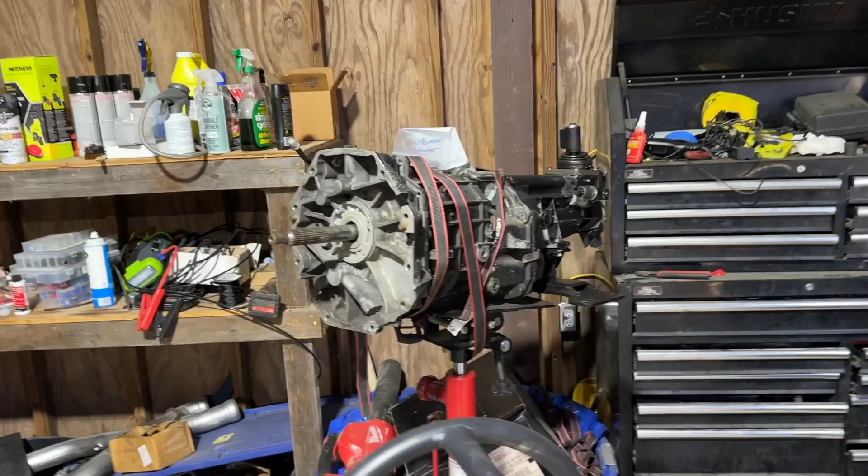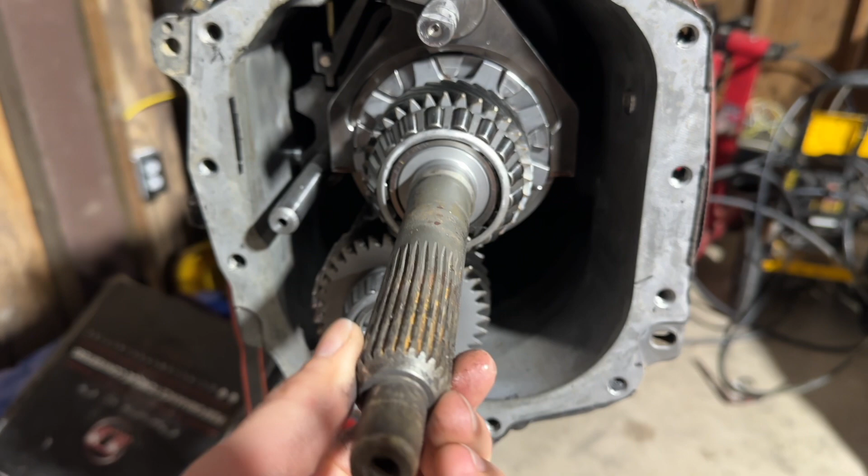Right here we have our face-plated transmission. This is the built trans that's in the race car. If you look at the splines there, we have officially twisted the splines, and that's not great. Unfortunately, that's a bigger problem than I had originally thought.

I said, okay, well, I twisted the input shaft, I'll just get a new one, throw it in there, call it a day. Well, here's the problem: this input shaft, go ahead and try to pull it out. That's right, you can't, because this is in the way, so it has to come out the backside. Not too big of a deal—order a new shaft, come in, go ahead and swap it out, take everything apart, put the shaft in, put it all back together same day.

Well, here's the problem. Liberty is the one who makes this face-plated gear set, and this is what's needed for this power level. They make an upgraded shaft and also a stock shaft, but they are 4 to 6 weeks out. And I'm also hearing that 4 to 6 weeks is more like 6 months, which is a huge problem if we want to race this car.

So unfortunately, I'm kind of stuck. This is a very inexpensive part in the world of this thing—about 400 bucks. I can take the shaft out and send it out, but I'm being honest with you guys, I can't take this thing apart, sit it on the table for what could be 6 weeks or 6 months, and effectively put this back together without a problem.

So that's where you need a transmission shop, and we might send this out to a transmission shop to get it done. The other option is to talk to someone like Calimer—they make a G-Force unit, which uses a completely different gear set. The only problem is it's very expensive. As you start going fast with a stick shift, this is the problem, right? So this is a $400 fix that takes 6 months, and the other one is a $12,000 fix that can be done in a few weeks.

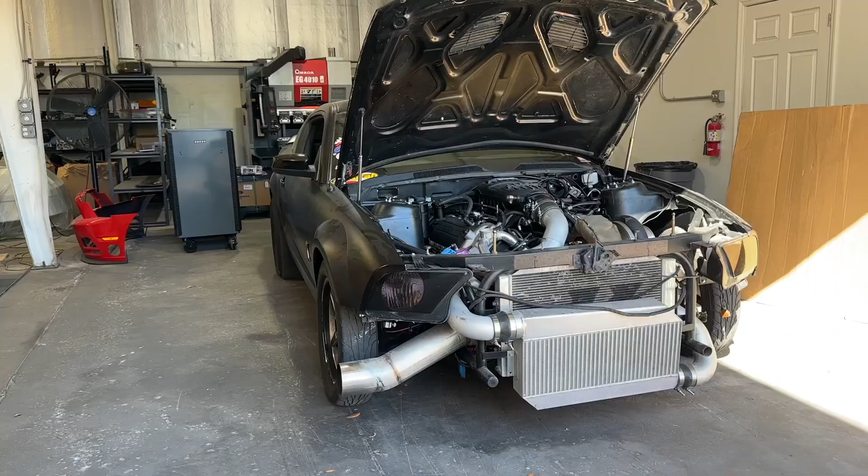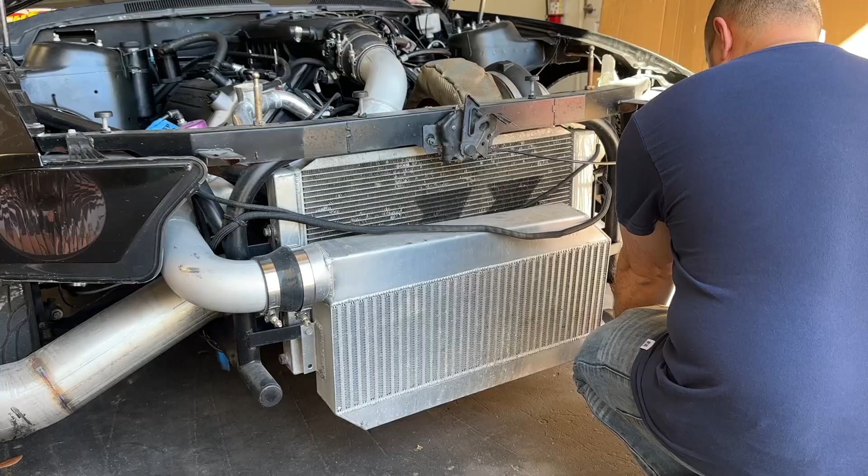Damn. That's a thick boy.

Just dropped the GT500 off with Siley - they're gonna go get that intercooler knocked out. It looks sick, it's huge, should work pretty well. I didn't plan this originally, but I got talking with someone last night - they really need their car tuned. It's at a dyno shop somewhere local here nearby in Tampa. I don't really know Tampa that well, so I just say Tampa, but there's Clearwater and all sorts of different areas, but it's only half an hour away, so we're gonna go head over there and check in.

I think it's like a Paxton blower 2-valve with cams. We're gonna try to get that tuned and knocked out, hopefully get paid there, and then head back, pick up the car, and then we might even be tuning another car in this area later - it's like a Kenne Bell 2-valve as well. So it's gonna be a busy day, but you know, we gotta hustle, we gotta make the money to pay the man.

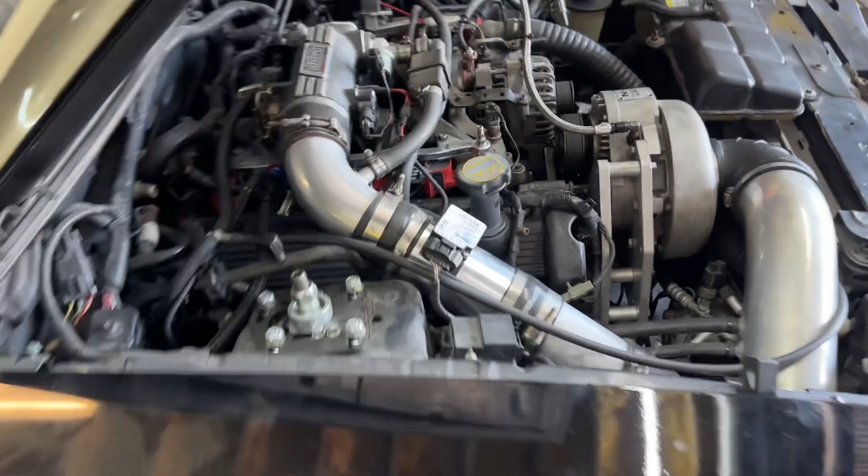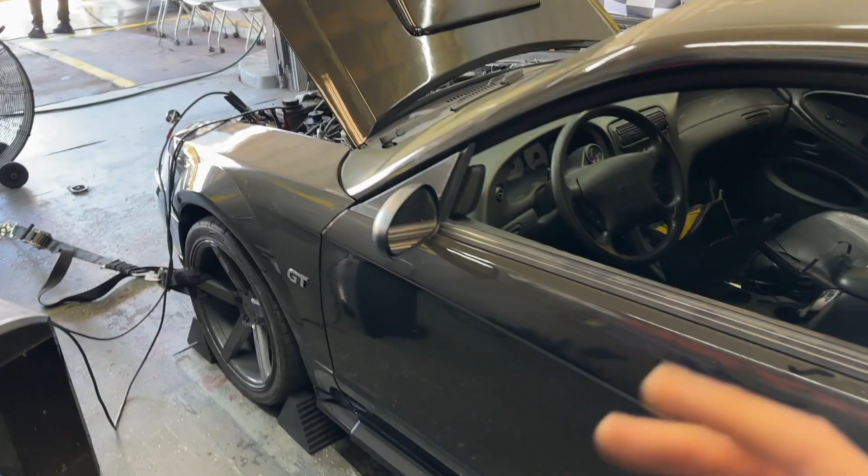I got it started running. This car hasn't ran in a long time, so we got to tune it. It's running decent. We're gonna start running on this dyno and see if we can get it to tune up decent. There's a few setup issues, but we're here now, so we're gonna try to make them work.

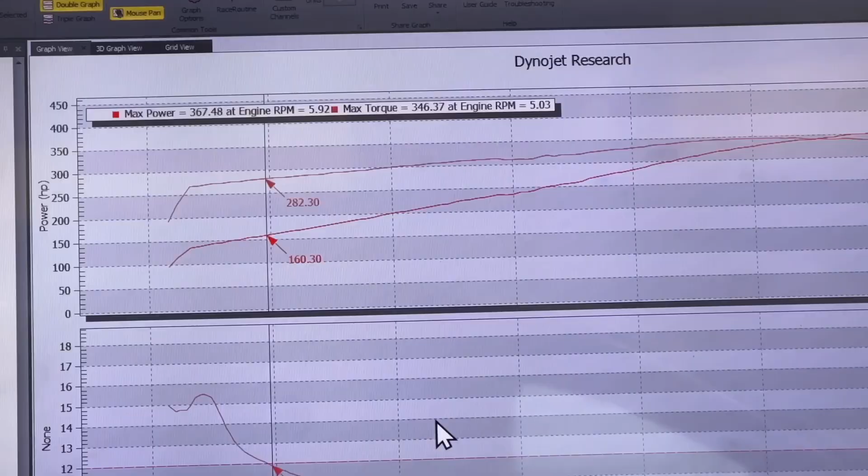First pull, we got 367, 346. It was pretty rich - the wideband's at the tailpipe. I don't really love it, but we're pulling some fuel out and gonna see if we can make some more power.

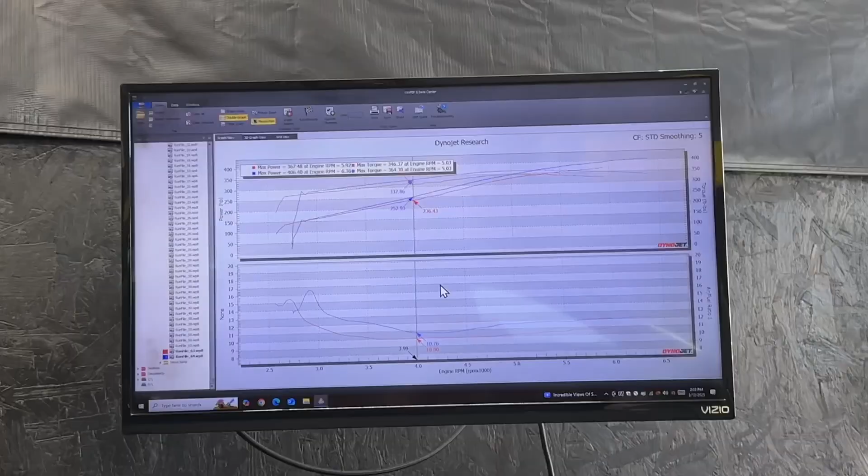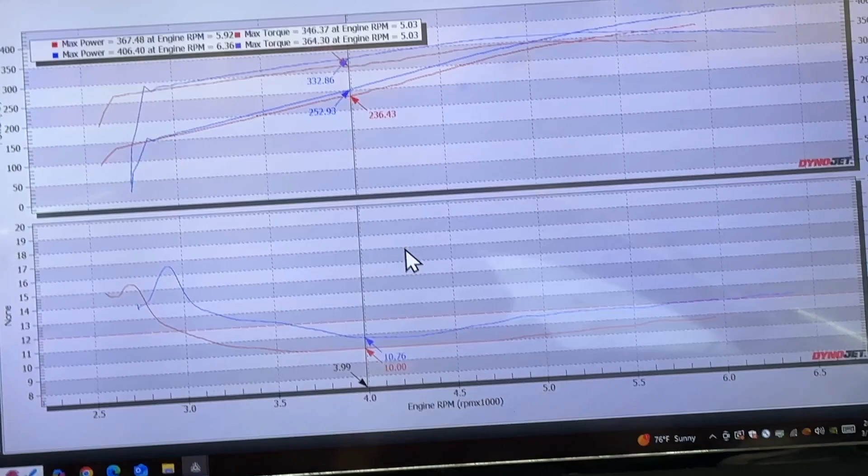Well, we saw some pretty good gains leaning it out - 406, 364. You can see the air fuel line is significantly better. This little dip where I have the cursor on, we're pulling some fuel out to 10.7. We're going to try to ride like a 12.0, 11.7 line as the boost starts to come in, and then ride this nice 11.7, 11.8 line.

What happened here? A little plastic just shut off - good old plastic intake manifold. Yeah, little fuel leak.

It made 400 horsepower, so twice.

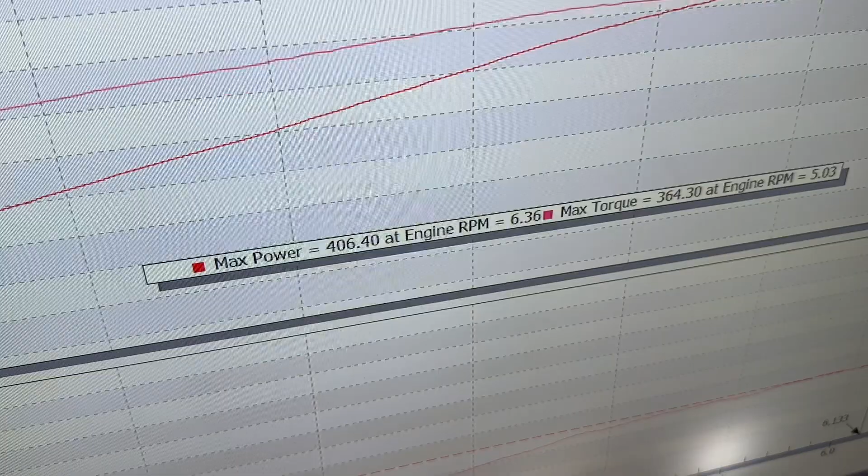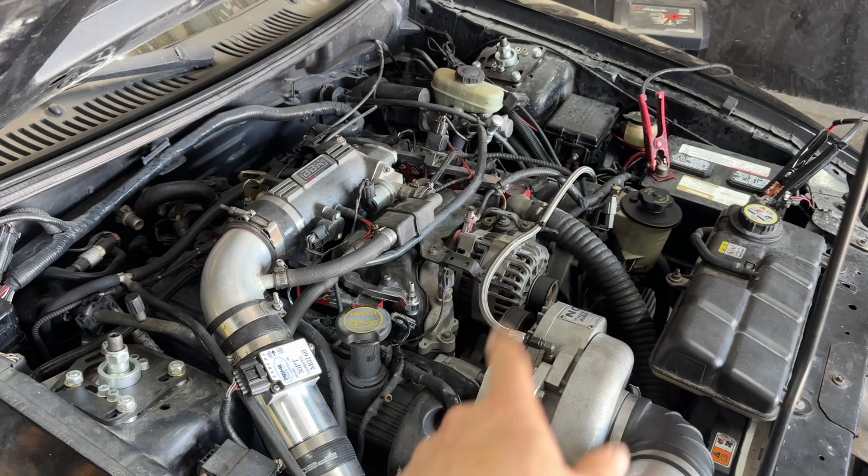We ended with 406, 364. It's about 6 pounds of boost. Air fuel's good. We didn't get to finish - I think it would have made about 420 or so, but it had the fuel injector problem, and then the alternator went out and it's throwing sparks and losing battery voltage. So it's gonna have to be fixed, but for the most part, I think it'll run and drive, and it'll be able to make some boost as soon as those things are fixed up.

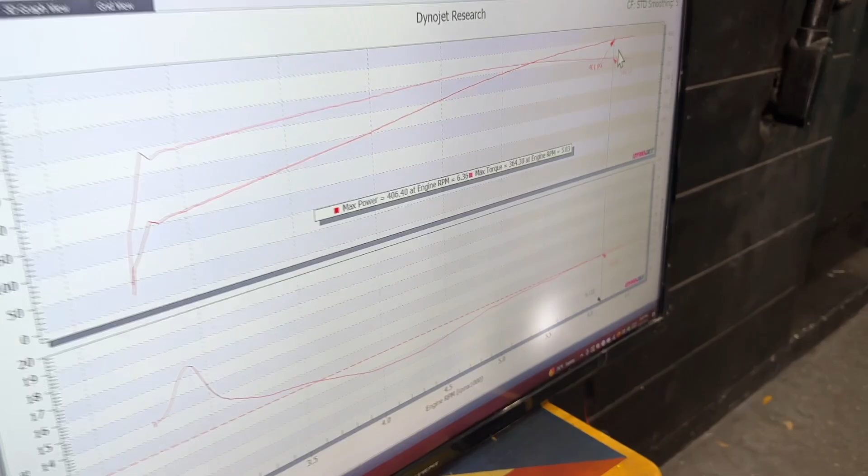Got the Paxton 2-valve tuned up, and it made some decent power: 406, and that's only on about 6 pounds of boost. It has some cams done to it, but otherwise nothing too crazy. I guess it's been sitting there for a while.

Had a chip tune in it, had someone else trying to tune it. The ECU was kind of bricked because this happens a lot—tuners will change strategies and VIN numbers and do some weird stuff with the computer, so SCT wouldn't connect to it. I actually used HP to force a stock file into it, and then I was able to load it with SCT. Weird things happen with these older cars, tuners, and chips, but we got it tuned up, and I think he's gonna be pretty happy because he hasn't had the car running or driving in a while, and he's put a lot of money into it.

So we're gonna head back, go check on the GT500 and help them finish that out. And then I think I got another 2-valve to tune later on.

All right, so we're here with Sai Lee. Hey, we just got the car finished up. Well, you did—I went off and tuned the car. You helped, you pulled the bumper off and brought me the car. Yeah.

So we got a custom intercooler. Do you want to talk about intercoolers and what we had there before, which was a more basic intercooler, versus what this is? Basically, Andrew reached out to me—he wanted an intercooler that was going to help him with our BLF turbo. What he said to us was, man, I'm having very high IATs. So here, check it out—this is what he had before. It was kind of small for what we're trying to do. I think you made about 1300 with it, basically. So his goals are obviously much higher than that.

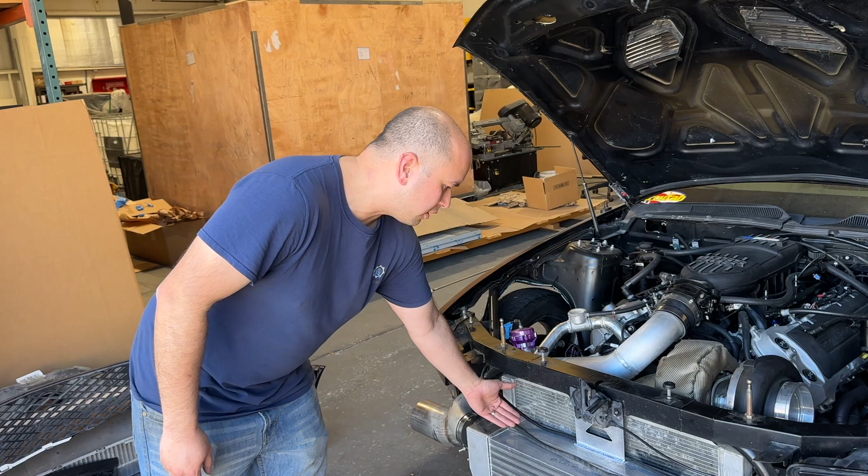So we built him a stacked-up Garrett intercooler using Garrett cores. It comes out to be a 6-inch core intercooler—a little bit of a tight fit, especially with the bumper. We had to murder that thing pretty bad, but it's on there now. So that's what we have—a big 6-inch core. I think it's going to help your IATs go down quite a lot. I can't wait for you to post some data on this, man.

Are you going to do that? Well, I mean, on the Dyno alone, assuming we don't get into some sort of valve spring issue, we should see some serious IAT differences and power differences. Because the IATs were so bad that the power curve would basically fall off. And I don't think it was valve float. No, I don't think so either.

I'm pretty sure the IATs were pretty high—I'm sure with the small core, you probably had a good amount of pressure drop from the intercooler. So now with the bigger intercooler core, I think we're gonna be doing a lot better. Let's see what the data shows, I'm pretty interested in it. Even on track, we went 164 with more boost trap in the quarter, and then it went 166 with 5 less pounds. Wow, so there's definitely something going on there. Yeah, but I'm excited for the results, man—let's see what we can do.

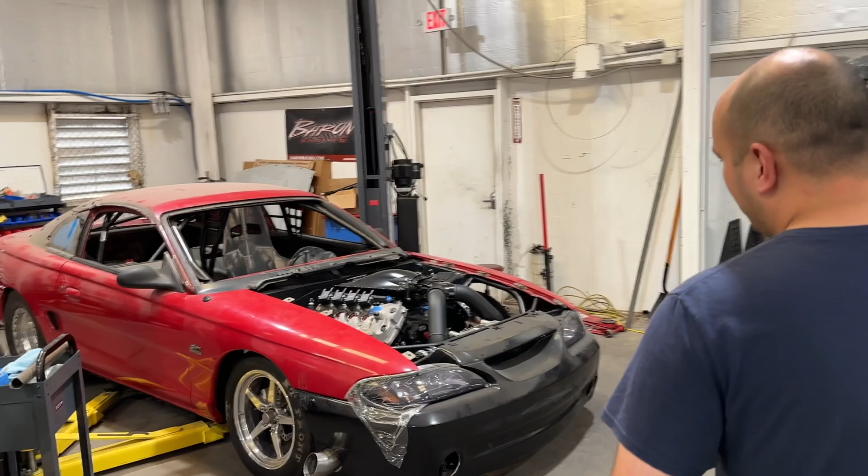The owner is Mark, and it's going to be a twin turbocharged Coyote. As you guys can see, it's basically done. Now it's going off to go get some wiring done.

That's pretty wild. These are some of my own cars that we're doing some small updates on. We have the covers on, so we're not going to show much about those.

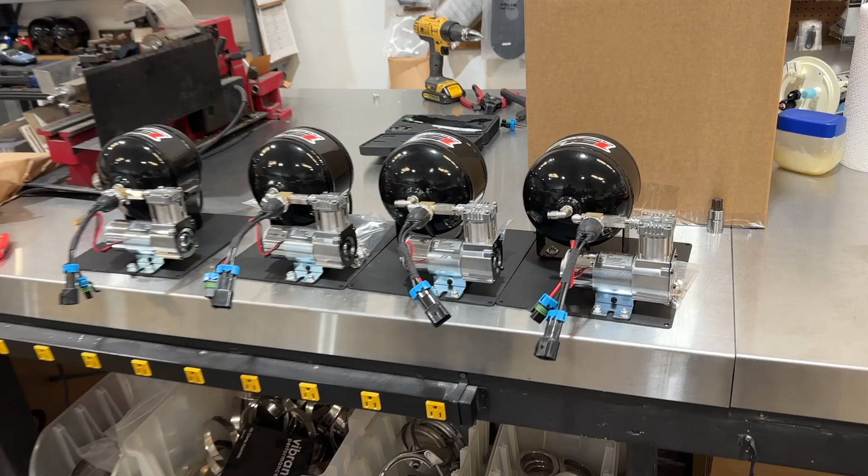I saw these earlier, these are pretty cool. So these are our onboard air kits. We assemble them here in-house, and we build the plates in-house too.

Basically, this is great for any type of boost controller, and this is something that almost every car needs, especially if you've got a street car, no filling up a CO2 bottle or anything like that.

This is some of our small inserts or parts for VL Fabrications. We got some wiring harnesses, small things like that, and this is our manufacturing side.

I don't typically do a ton of car stuff, but we're in there. This is our laser that we run, a 6,000 watt laser. We have 2 welding stations.

These are some of our fabricated tanks. This is our sheet metal shop, basically, where we make a lot of these parts, like your intercoolers.

So this is another one of our manufacturing tools, our press brake. It's a 6-axis press brake, state of the art - we can hold within 5 thousandths tolerance on all bends with sheet metal. That's kind of what I actually do a lot of now.

We actually manufacture for different industries like the military, medical, industrial, things like that. So that's kind of why you guys haven't seen me too much in cars, but I'm getting slowly back into it, and we're gonna have some more fun here soon.

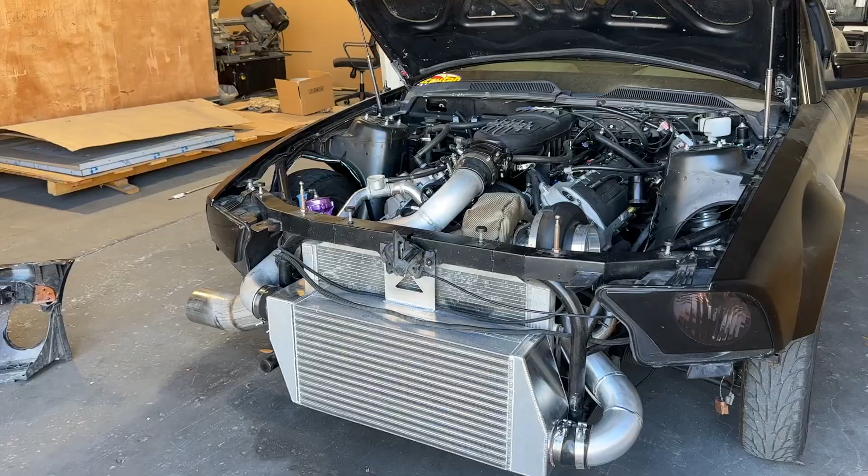Been on the road for a little bit, but got a little drive back. Got the car and the trailer.

Overall, pretty good day. We got the GT500 intercooler installed and on the car. Cy Lee and the guys killed it on that. He had built the intercooler previously, and I gave him some measurements, so we kind of got it in the ballpark.

I got that Paxton 2-valve tuned up, made some good power. You guys saw that. We picked up the car, got a little walk around at Cy Lee's shop and his multiple businesses that are going on there, which is so cool.

I didn't get to get some good video of the Kenne Bell car running. We did get it running, but it did have some problems. It had an IAC code. It also had both primary O2 sensors disabled or open circuit, so he has to get that fixed.

And then he was like, oh, I happen to have a Mega Squirt. And I'm like, dude, why are we doing this on a Mega Squirt? So he's got a few more things to fix up on it, but it does run now, so he should be able to dial that in, and we should be tuning that Kenne Bell 2-valve here pretty soon on the dyno back at the shop.